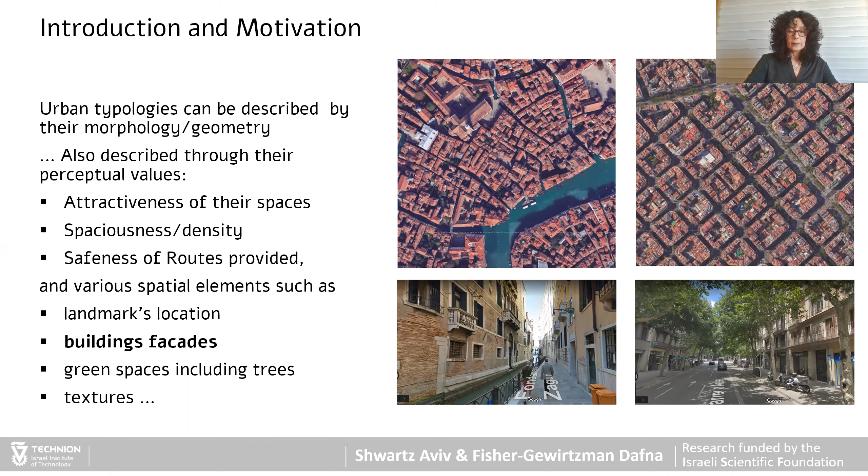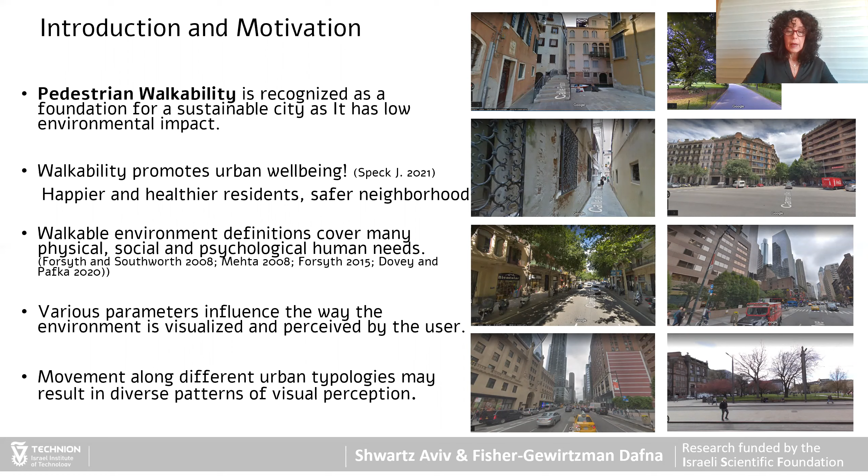Encouraging pedestrian walkability is one of the fundamentals for sustainable urban environments. As we know, walkability promotes urban well-being, happier and healthier residents, and safer neighborhoods. That is why various parameters influence the way the environment is visualized and perceived by the user along pedestrian paths. Movement along different urban typologies may result in diverse patterns of visual perception.

Our research objective was to explore the perceived values in various urban typologies through an experiment in virtual reality, and to point out the influence of facade design, textures, elements, etc., as part of the general evaluation by experiment subjects.

The research background includes work from the following relevant areas: how built environments influence pedestrian behavior, research based on experiments conducted in virtual reality, and the development of visibility analysis and simulation tools for predicting pedestrian well-being.

Focusing on the dynamic 3D visibility analysis, the DVA model that was developed in our lab and assessed by experiments in our VR lab, we aim to further update and advance the model.

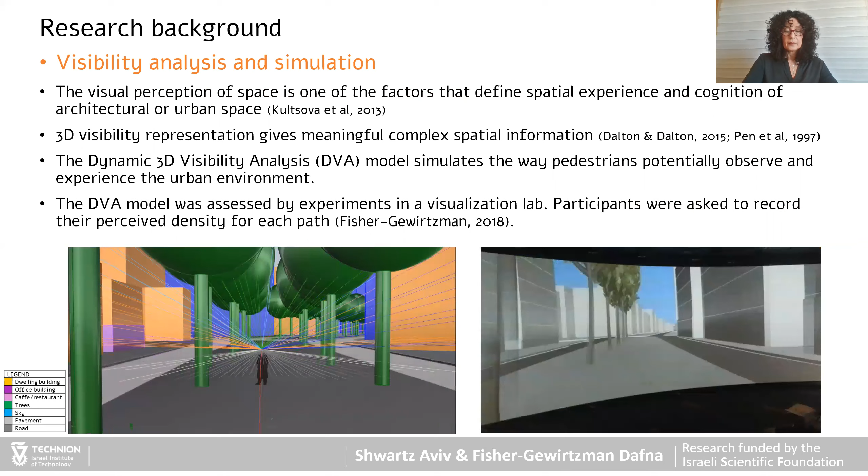This work is a follow-up research project focusing on these four case studies of different urban typologies: different density, height of buildings, land cover, textures, and building facades, where we expected the perceived values to be very different.

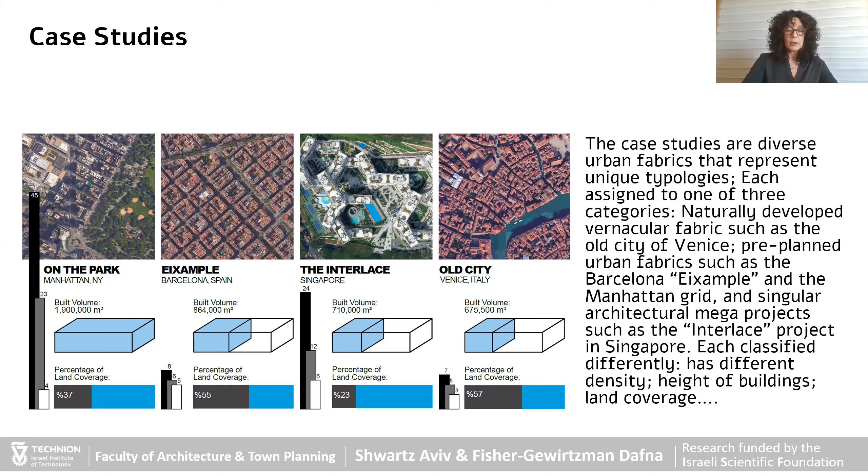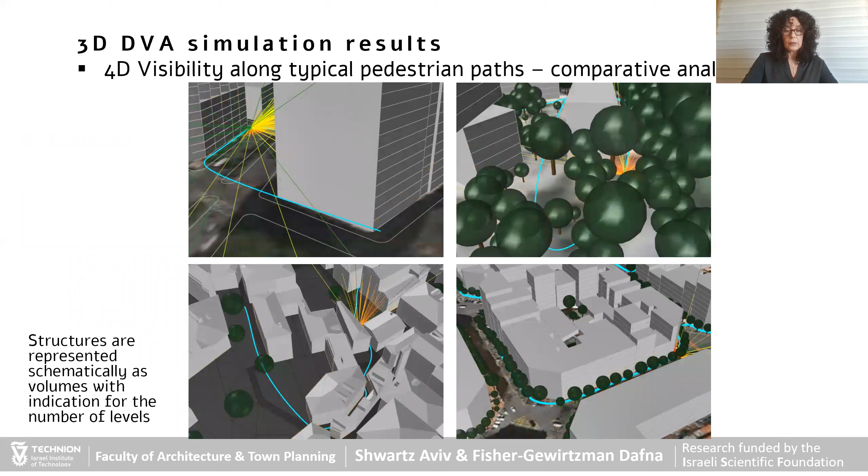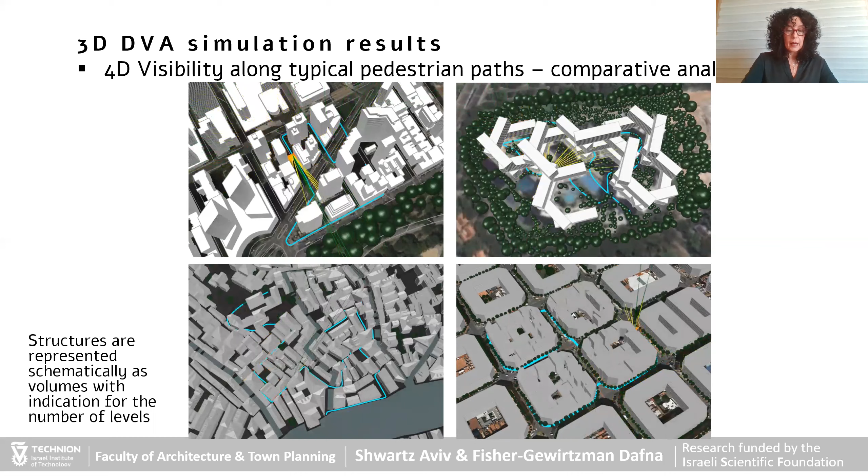Previously, we simulated the visibility of pedestrians in all four case studies, walking a typical route: Manhattan and Barcelona along the grid, Venice along the narrow alleys, and Singapore a much more free path. The outcomes were unique patterns of visibility graphs for each case study, calculated by the DVA model.

For the current experiment, we realized we needed additional parameters such as textures and facade detailing in order to create a stronger sense of realism for simulating the different pedestrian paths.

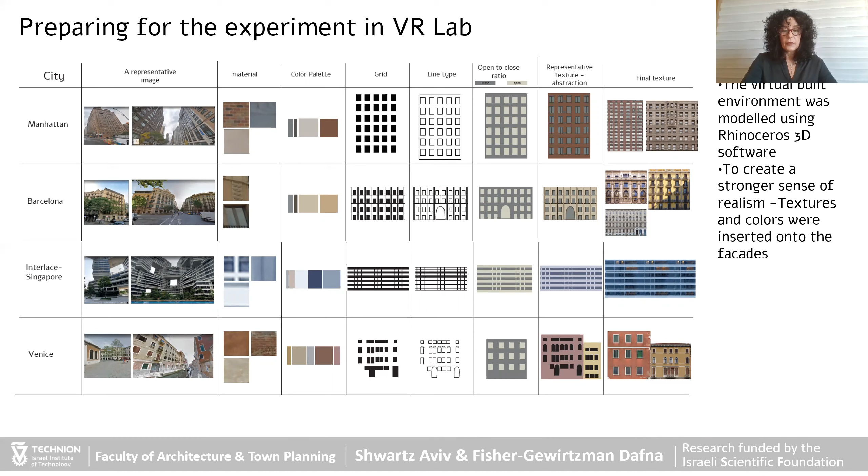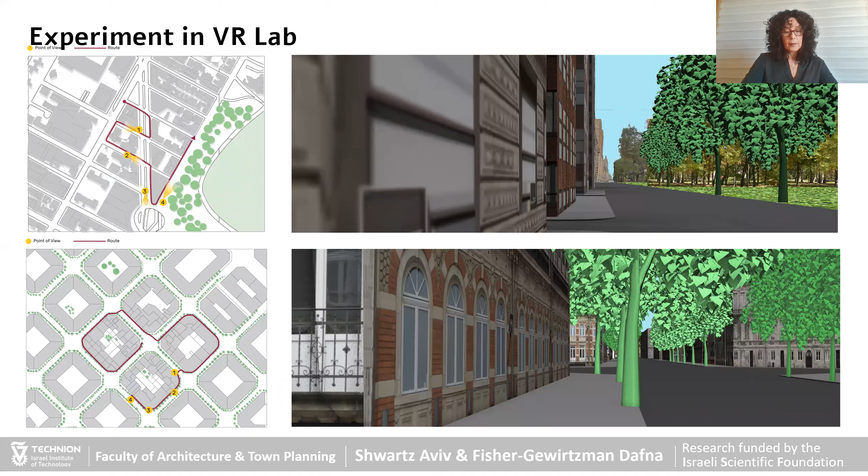We prepared video clips following the typical routes for each case study: Manhattan, Barcelona, Singapore, and Venice.

Subjects were asked to evaluate each route on a scale of 1 to 7. In an additional questionnaire, they were asked to indicate which parameters influenced their experience in a positive way during the virtual tour.

We will go through some of the experiment mean value results, such as, would you like to explore this route? Manhattan was the most favorable and Singapore the least.

Does the environment along the route make you feel relaxed? Barcelona was the most relaxing and Venice was the least. How illuminated is the route? Singapore was the most, Venice was the least.

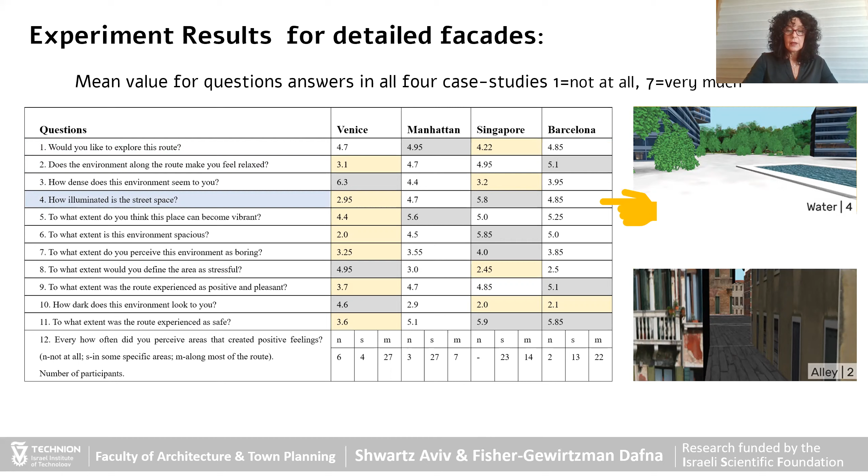For experiments with the detailed facades, a positive and pleasant environment was also perceived as relaxing, safe, and illuminated. Stressful environment was also dark, unsafe, dense, and unspacious. We did find a gap between positive feeling in the environment and the desire to explore it in Singapore. Parameters that led to positive feelings were visual openness, amount of vegetation, and appearance and style of building.

That is when we decided to conduct the same experiment with blank facades. So now we compare the results from both environments for each location, detailed facades and blank facades.

For Venice, detailed facades were perceived as more explorable, relaxing, illuminated, vibrant, and safe. Blank facades were perceived as even more stressful, darker, but their perceived density was similar in both.

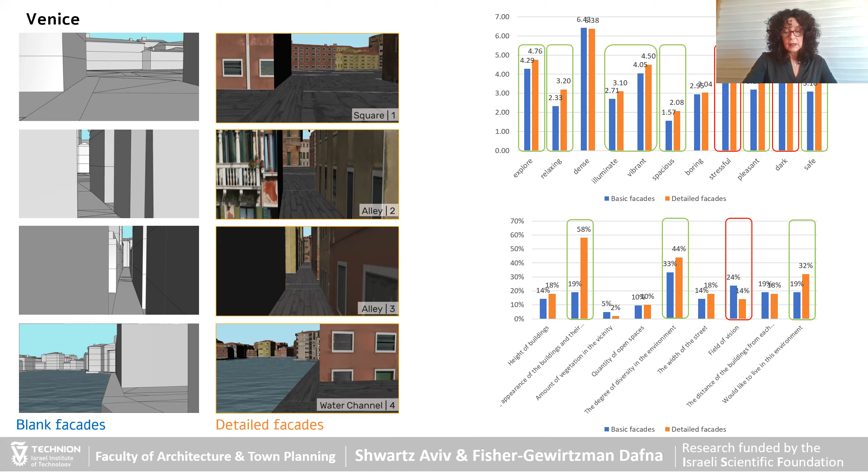Detailed facades for Manhattan were perceived as more explorable, relaxing, illuminated, vibrant, spacious, pleasant, and safe.

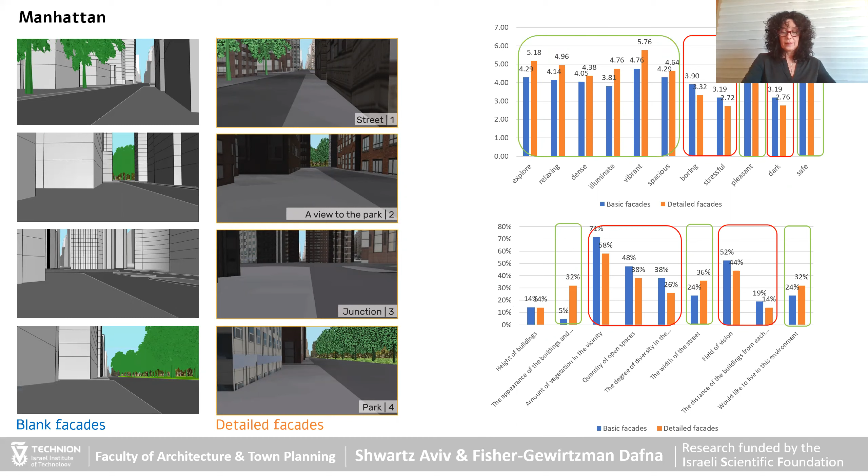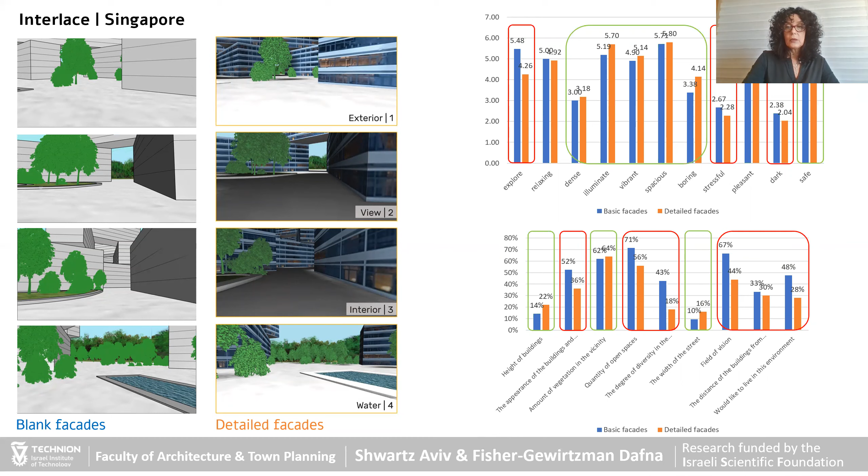In Barcelona, the detailed facades were more explorable, relaxing, illuminated, vibrant, spacious, pleasant, and safe. Appearance of buildings raised from 5% in the blank facades to 50% in detailed facades. This is also probably due to their morphology.

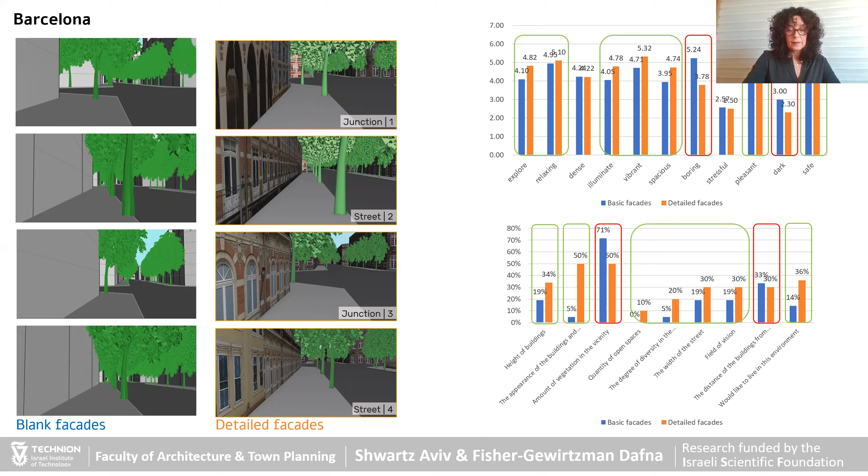To summarize, in 3 out of 4 case studies, the appearance of buildings and their style was much higher in detailed facades for Manhattan, Barcelona, and Venice. For the Interlace, it was quite the opposite.

Vegetation was much more influential for blank facades in Manhattan and Barcelona. In Singapore and Venice, it was very similar for both: very high in Singapore and very low in Venice.

The degree of diversity was more noticeable in the blank facades for Manhattan and Singapore, and in the detailed facades for Barcelona and Venice.

Subjects preferred living in detailed facades for Manhattan, Barcelona, and Venice, but preferred the blank facades in Singapore.

Detailed facades created more pleasant moments along the path in Barcelona and Manhattan, and the blank facades did so for the Interlace in Singapore.

So, our summary, conclusion, and future plans. In this research project, the perceived values in various urban typologies were explored through experiments in virtual reality. The influence of facades was tested in a parallel experiment as part of the general evaluation.

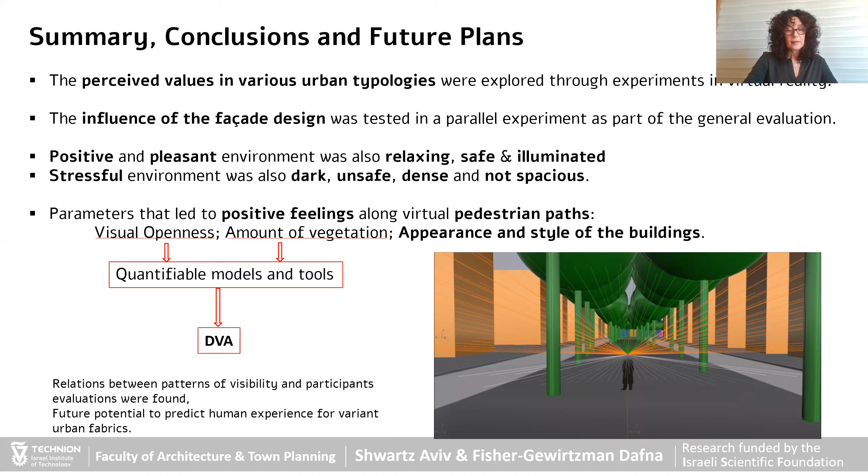As we learned, building facades along the pedestrian route had a great impact on the perception of well-being of the users. Additional case studies are currently examined. The relations of urban typology, building typology, and facade typology will be explored, along with their relative influence on well-being.

We plan to update the DVA model as an urban well-being simulation and assessment model. The DVA could help explain various urban phenomena and can be used to predict and evaluate the human experience in existing urban environments, as well as a tool to evaluate future planning and design proposals for better pedestrian experience.

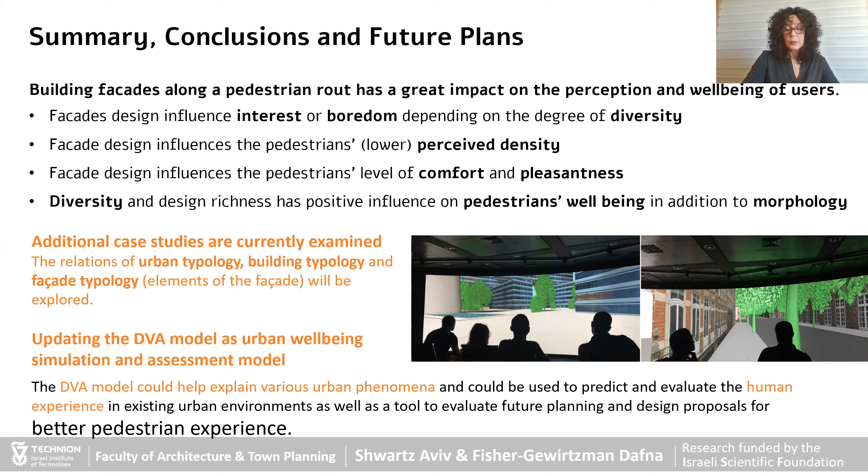In future urban environments. We thank you very much for your attention.